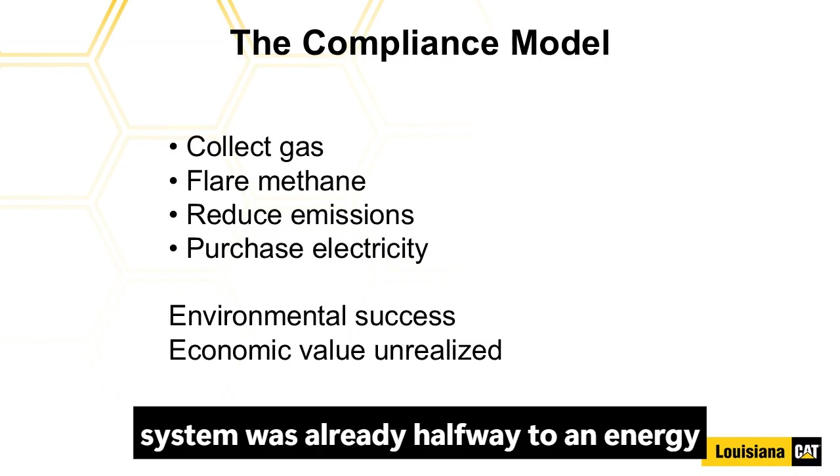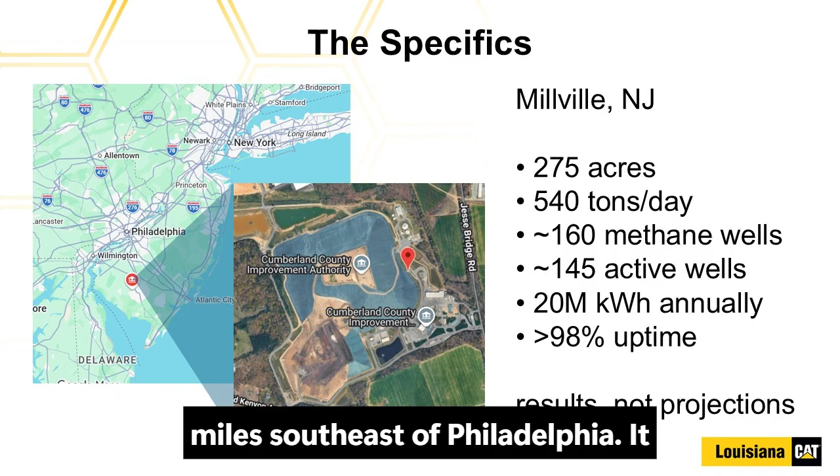Let's look at the specifics. The landfill sits on 275 acres in Millville, New Jersey, about 45 miles southeast of Philadelphia. It receives roughly 540 tons of solid waste every single day. There's approximately 160 methane wells, and they run about 145 of them actively at any given time.

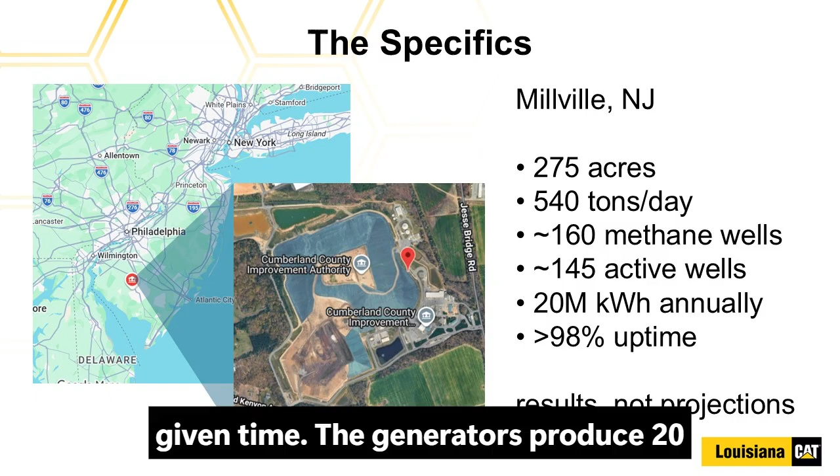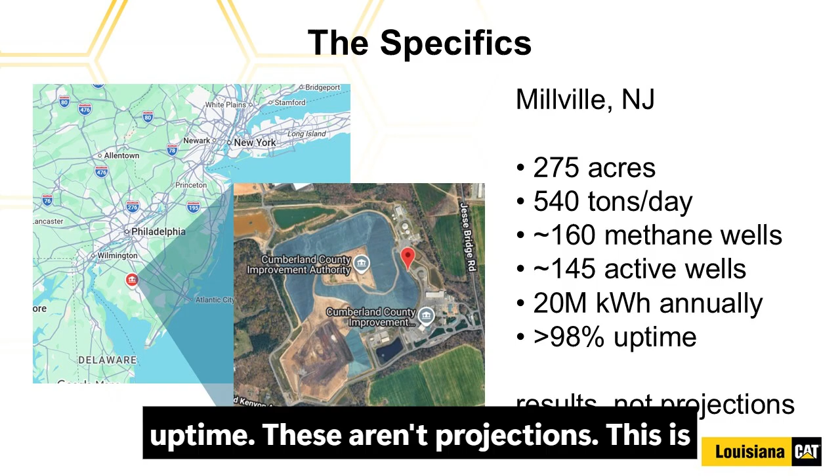The generators produce 20 million kilowatt hours annually. To put that into perspective, that's enough power to run about 1,600 homes. Generators exceed 98% uptime. These aren't projections—this is not theory. For Cumberland County, this is operational reality.

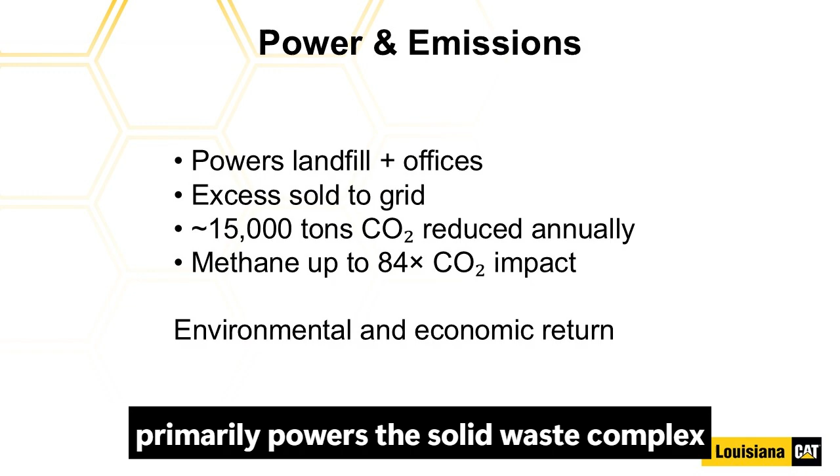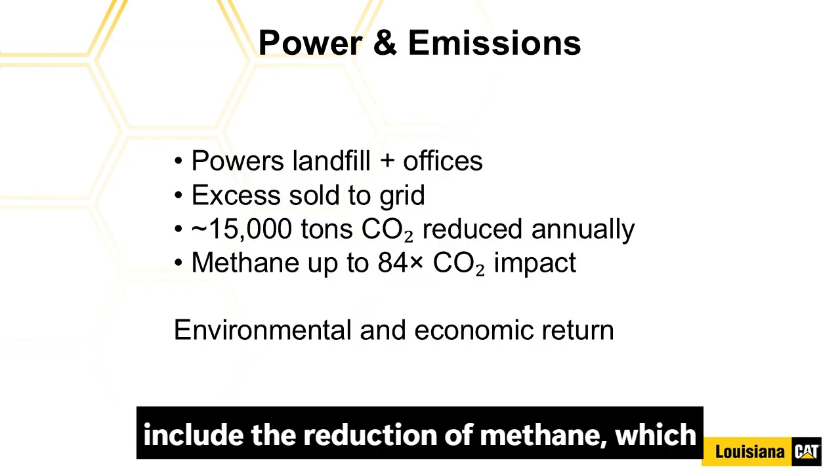The 4.8 megawatt plant primarily powers the solid waste complex and its nearby admin offices, but they do sell excess electricity back to the utility grid. The project reduces about 15,000 tons of carbon dioxide annually, and that doesn't include the reduction of methane, which has a global warming potential of up to 84 times that of CO2. Controlled combustion through power generation creates both an environmental and an economic return.

There's also a community dimension here. If you drive by a landfill and you don't smell an odor, that's a good day. Reduced flaring, reduced truck traffic, reduced visible emissions—sustainability here is not abstract. It's something the neighbors are experiencing.

Cumberland County entered its energy partnership around 2011 through a state bid process. The authority avoided upfront capital costs through a private partner-funded energy power plant. Cumberland shared some of the costs on the public portions. The partnership spread risk and kept costs predictable.

Ownership of the power plant has changed hands several times. It started with PP&L, they were bought out by Talen, then EPP, and now it's operated by NextEra. But today, they're considering buying out their energy partners. The structure has allowed the authority to leverage private technical expertise while limiting capital exposure.

The estimated annual economic impact of the microgrid is about $13.5 million. Importantly, operations are still funded through tipping fees and related revenue, but not taxpayer subsidies.

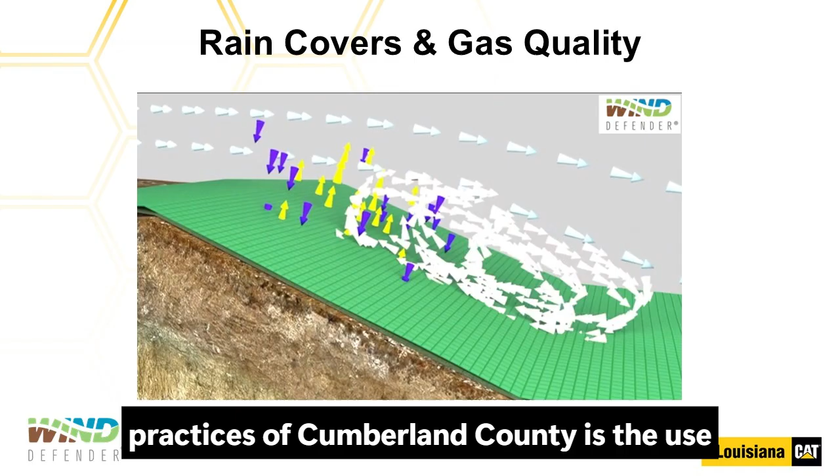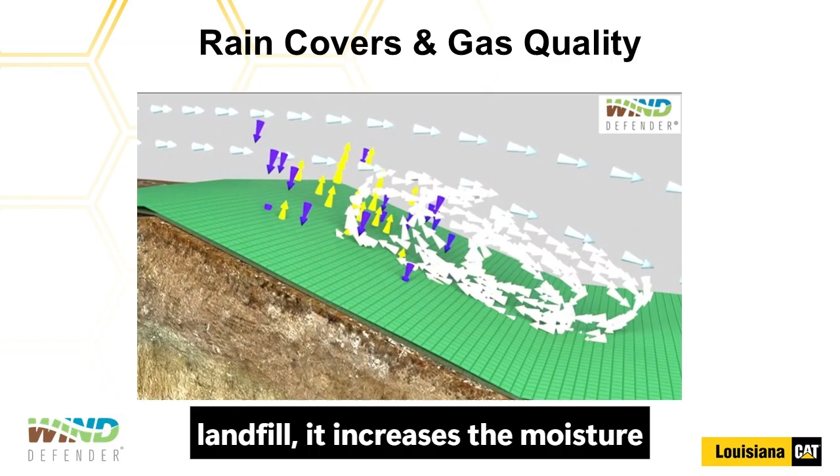It all begins at the surface. One of the important operational practices of Cumberland County is the use of rain covers. Now, rain covers are normally thought of as a leachate control tool, but they're also a gas management tool. When stormwater infiltrates the landfill, it increases the moisture content within the waste mass, and that moisture increases the leachate generation and can dilute the methane within the gas stream.

So by increasing rain cover, the authority reduces stormwater infiltration. Less water entering the waste mass means less leachate formation, but it also means a more stable gas environment underground. The more stable the methane concentration, the more stable the combustion stability at the engine. Landfill gas is already variable, so anything you can do to reduce variability improves your uptime.

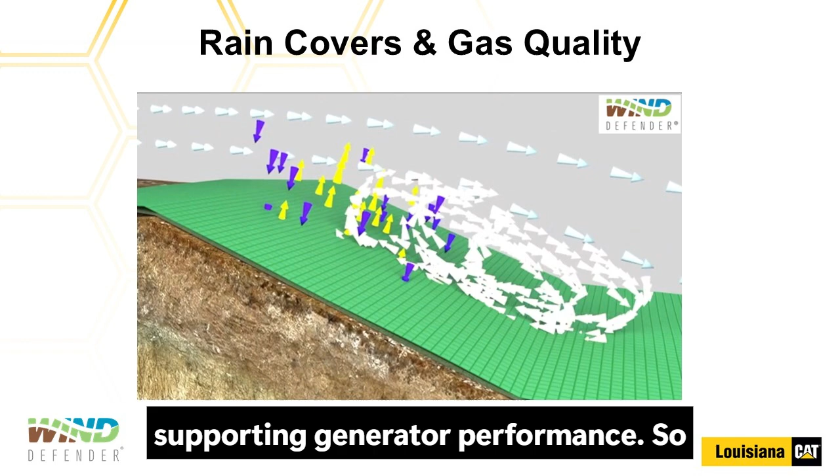The covers therefore serve multiple functions at once: reduce the leachate load and support gas quality. They are indirectly supporting generator performance. So here's how they do it.

Cumberland is required to cover the fill with 12 inches of soil, and then they use a 20 mil geocomposite liner stitched together over top. But instead of using ropes and sandbags, they use the Wind Defender green mesh that goes over top of the

black liners, which is uniquely designed to be held in place by the wind. Again, integration. A surface decision here is affecting subsurface chemistry, which also affects engine reliability and ultimately affects revenue. Covers are not just environmental controls, they are operational strategy.

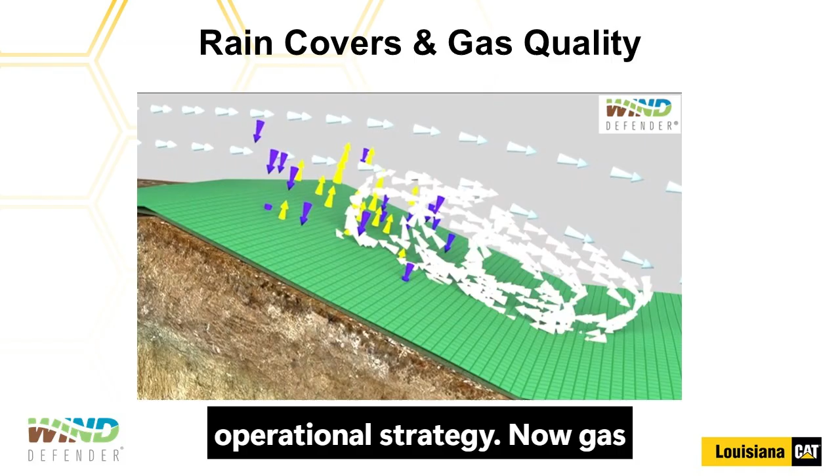Now, gas management depends on how you collect it. At Cumberland County, there's about 160 methane wells with about 145 active at any given time. As the landfill expands, additional vertical wells are added.

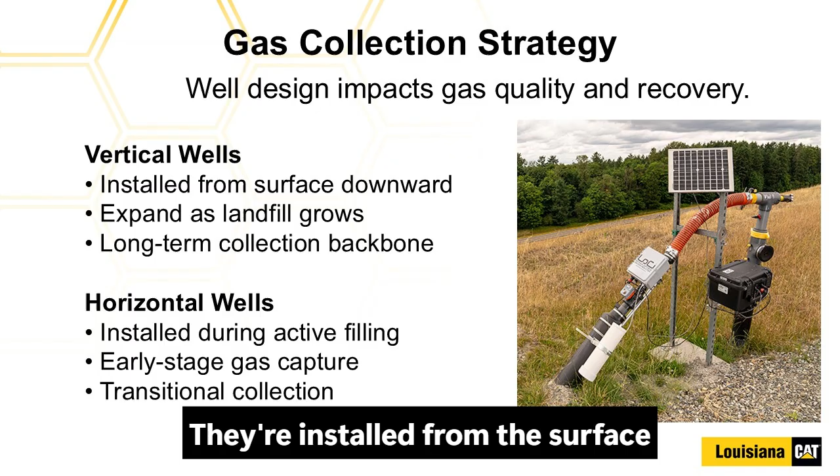Vertical wells form the long-term backbone of the gas collection system. They're installed from the surface downward into the waste mass, and they remain active through later stages of the landfill development. Because methane follows anything penetrating the soil, the well is drilled down to the bottom and perforated pipe is installed all the way up, but no closer than 40 feet from the surface. Each well is about 200 feet apart to prevent overdraw on other wells, and they keep them 40 feet from

the side slopes. Horizontal wells, by contrast, are typically installed during active filling. They allow early gas capture before the cell is fully built out. They can improve early methane recovery and reduce uncontrolled emissions in newer sections of the landfill.

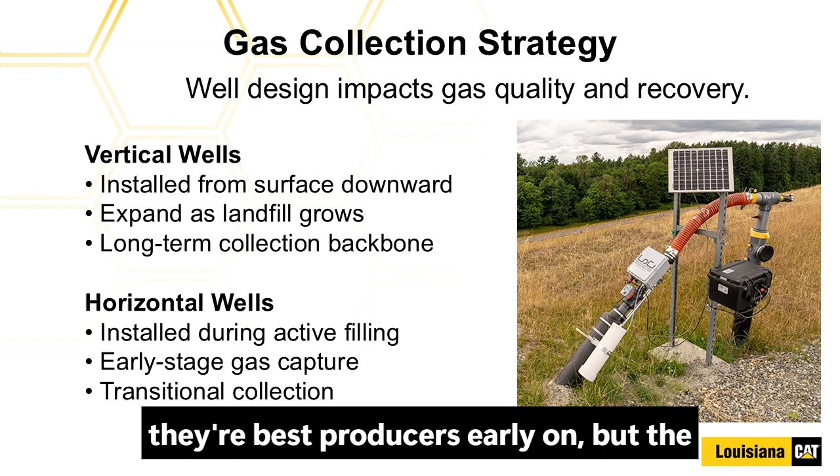However, horizontal wells are sacrificial. They collapse under pressure as the fill gets deeper, and because they are used to catch early gas, they're best producers early on. But the pipe valleys get filled in with water, and there's no way to fix that.

So there is a strategy component here. Horizontal wells support early capture, vertical wells support sustained collection. As waste mass matures, vertical wells become more critical to maintaining consistent gas quality and volume.

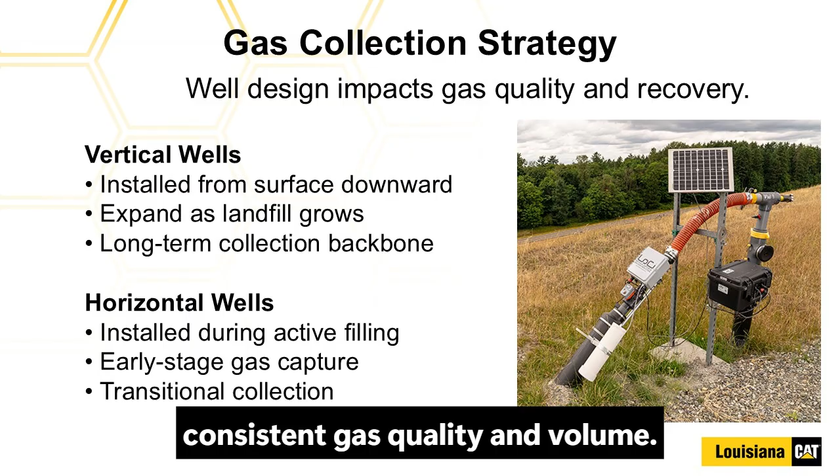Good power starts with good gas. Well field design affects oxygen intrusion risk, methane concentration stability, and total recoverable gas. It directly influences combustion stability at the engines. That's why the site conducts frequent monitoring, including approximately 8 daily readings on key wells, and holds monthly performance reviews.

So the authority uses the automated wellheads on 50 wells, and they take 8 samples per day. Cumberland meets then with Loci monthly to discuss trends. What they've found is that oxygen intrusion is their biggest enemy. They keep service techs and spares on site and conduct proactive maintenance, and gas quality is managed intentionally.

It's not just assumed. It's important to understand that landfill gas is not pipeline gas. It's roughly half methane and half whatever comes out of the land. Sulfur compounds, siloxanes, moisture. Variability is a constant reality, and the engine selection matters.

So according to Steve Gabriel, partner with EPP, you need a very robust engine to actually take care and destroy the gas and make electricity. They did a lot of research, and they found that Caterpillar had a very robust type of engine that could handle biogas at the landfill.

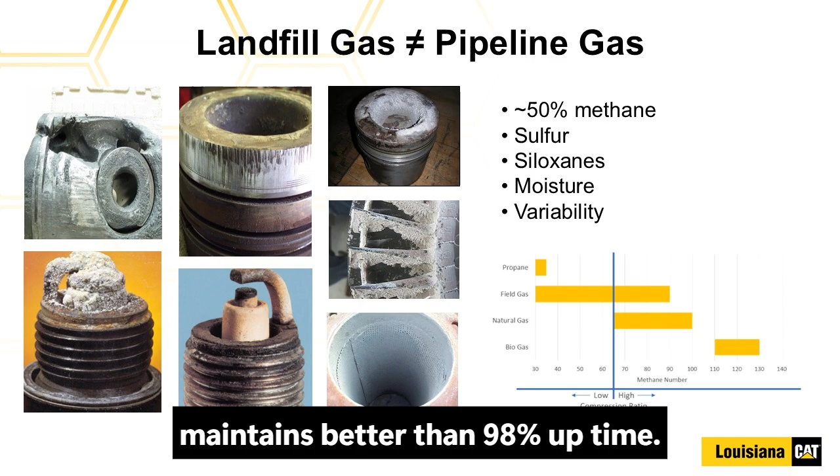Other landfills tried to do this as well with other engines, but the Cat engine's unique, and they said there's not a lot of manufacturers that have a product that can handle landfill gas. Reliability here was not optional, it's foundational. Today, the system maintains better than 98% uptime.

What did they install? It was 3 Cat G3520 generator sets. It's a 4.8 megawatt landfill gas to energy facility, but they didn't stop there. They built and operate their own microgrid.

During the design, they found that in order to run at greater than 80% uptime, they would need a gas supply of 1,400 SCFM. But they're not running at 80%, they're running at 98% uptime. How did they do it?

Well, originally they planned to run 2 engines and keep a third one in reserve, but instead now they just run 3 engines at a reduced power factor.

Because what they found was if they're running two engines and one unexpectedly goes down, it takes time for that third engine to start up, reducing uptime. But if they're running three engines at reduced load and one goes down, the two remaining engines can pick up the rest of the load.

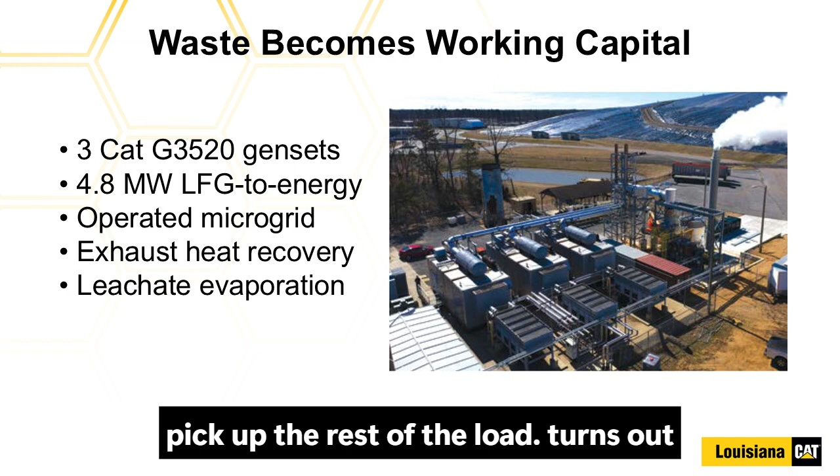It turns out that downtime now is only for planned maintenance. The next opportunity emerged from simple observation: the engines were producing continuous exhaust heat, and that heat was going to be unused.

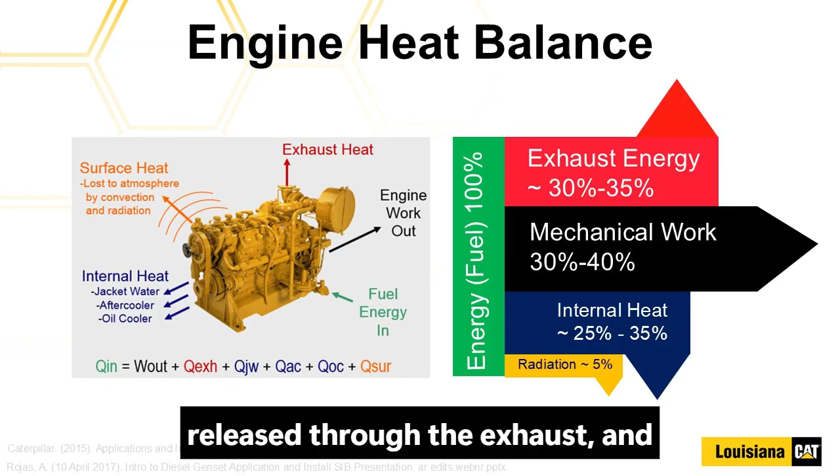So let's do a quick review of basic engine heat balance. The total fuel energy entering the system, whether gas, diesel, or another fuel, only 30 to 40% is turned into mechanical work, which is then turned into electrical work. The rest is released as heat: 25 to 35% internal to the engine, 30 to 35% released through the exhaust, and around 5% just radiated off the engine.

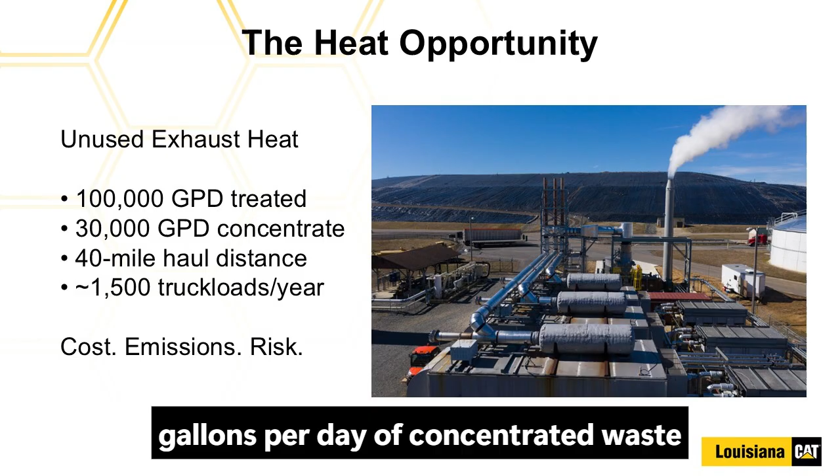At the same time, the site was treating about 100,000 gallons of leachate per day through reverse osmosis, creating roughly 30,000 gallons per day of concentrated waste that had to be hauled away 40 miles. Nearly 1,500 truckloads per year left the site. It was cost, it was emissions, it was risk.

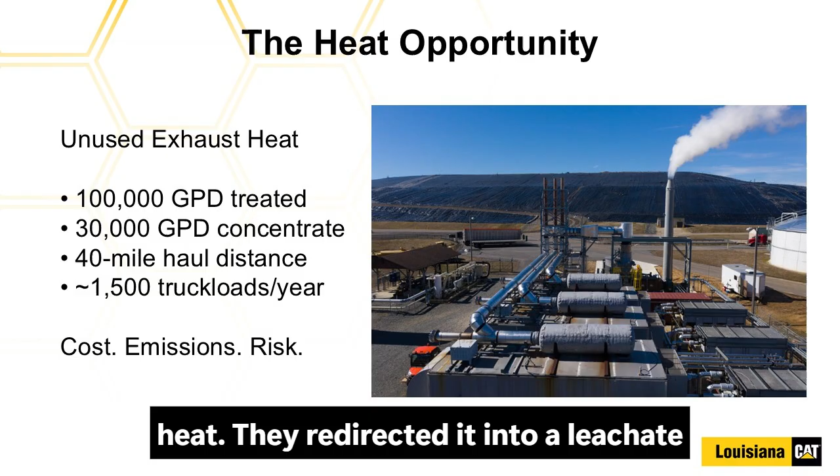But what they did was capture the generator exhaust heat and redirect it into a leachate evaporation system. Waste now is becoming working capital.

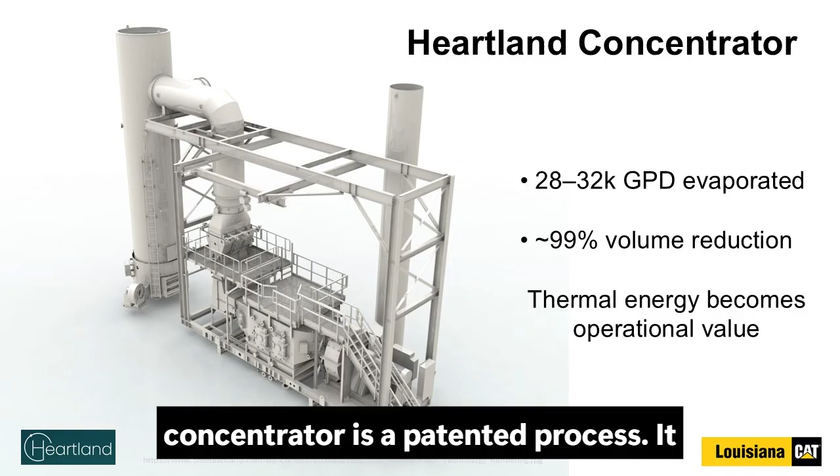Working with Heartland Water Technology, the authority installed the Heartland concentrator system. The Heartland concentrator is a patented process that uses exhaust heat from the power plant for evaporation, creating an energy-efficient cogeneration solution.

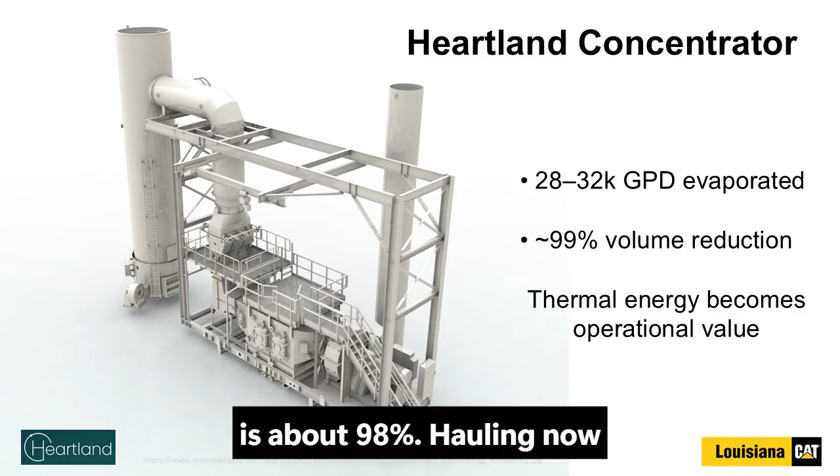The exhaust streams from the generator are ducted under negative pressure into the concentrator, where thermal energy evaporates the leachate concentrate. The system now evaporates between 28,000 and 32,000 gallons of leachate concentrate per day. Combined with reverse osmosis, the overall reduction in raw leachate volume is about 98%. Hauling now only exists in case of emergency or planned maintenance.

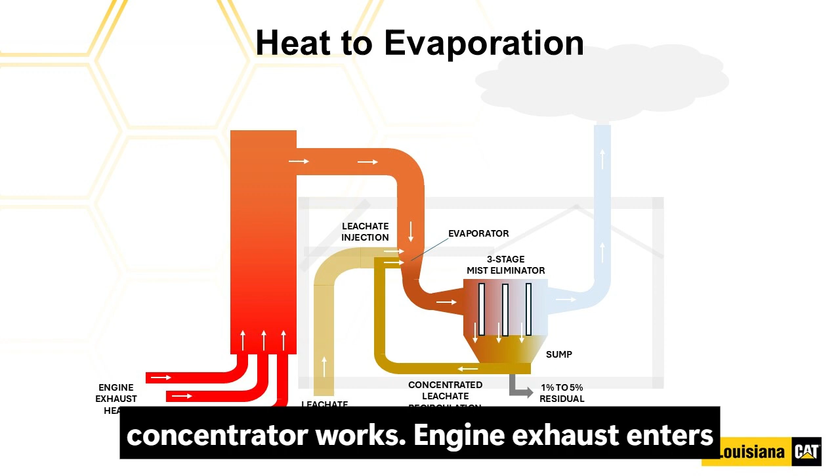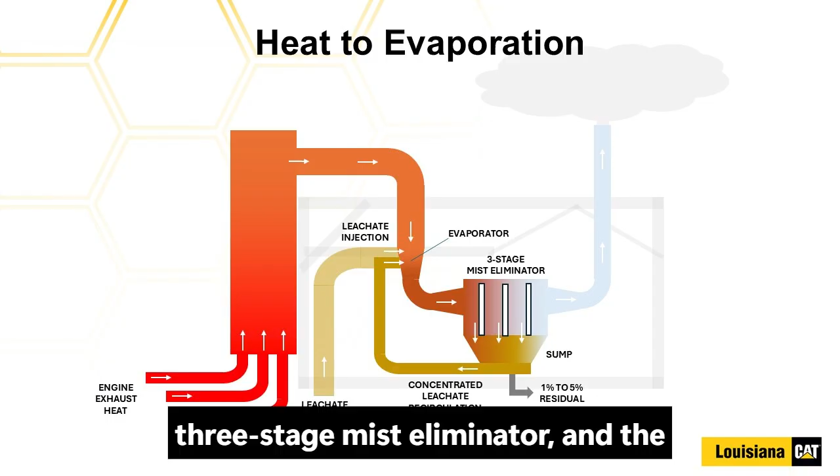Here's an overview of how the concentrator works. Engine exhaust enters the column on the left and is ducted into the mixing chamber where the leachate is atomized. The mixture passes through a three-stage mist eliminator and the water vapor exits the stack. The concentrated leachate is recycled through the evaporation process.

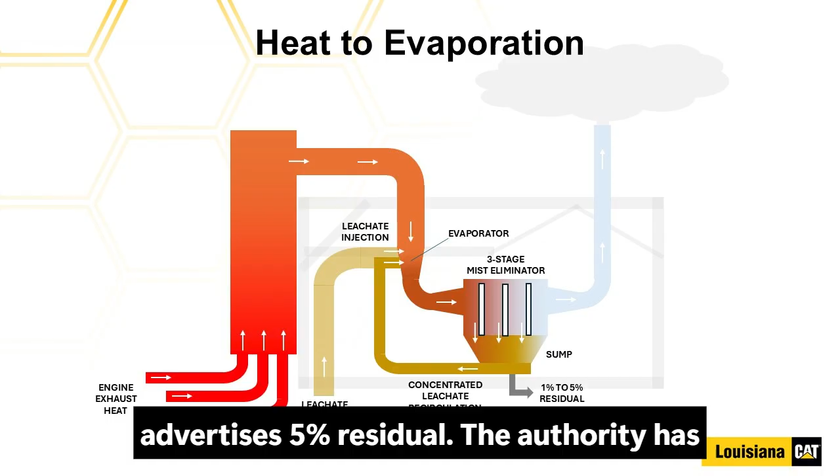Heartland advertises 5% residual. The authority has experienced as low as 1% residual.

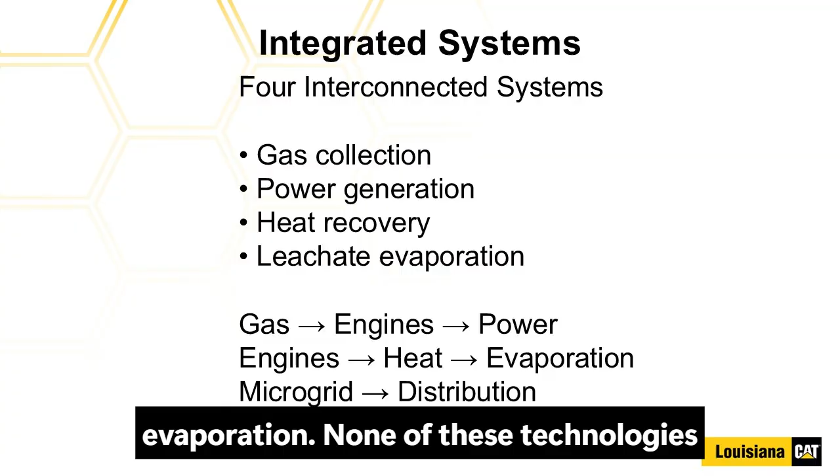When you step back, the energy hub rests on four integrated systems: gas collection, power generation, heat recovery, and leachate evaporation. None of these technologies are revolutionary on their own; the value comes from integration. Gas flows to the engines, generators produce electricity, engine heat drives evaporation, and the microgrid distributes power on site. Each system reinforces the other.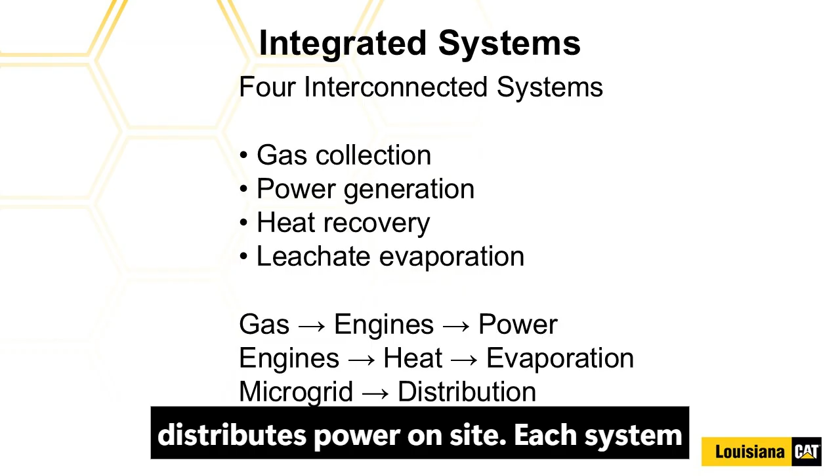What about renewable natural gas? Well, it was evaluated. The site's volume and scale, cleanup, and pipeline economics did not support renewable natural gas as an optimal pathway. Electricity generation provided better alignment with available gas qualities and infrastructure realities. They needed about 3,000 SCFM of renewable natural gas in order to sell it.

The lesson here is not that renewable natural gas is inappropriate. It's that it has to be a strategic fit, more than a trend to chase. Each landfill must evaluate scale, capital, and market access independently.

This transformation required a mindset shift. Instead of asking how do we comply, leadership began asking how do we control our energy destiny. Control meant owning electrical infrastructure. Control meant reducing dependence on hauling. Control meant internalizing energy flows instead of exporting value.

Sustainability became an operational strategy, not just environmental messaging, not just a compliance expense. And they're not done yet.

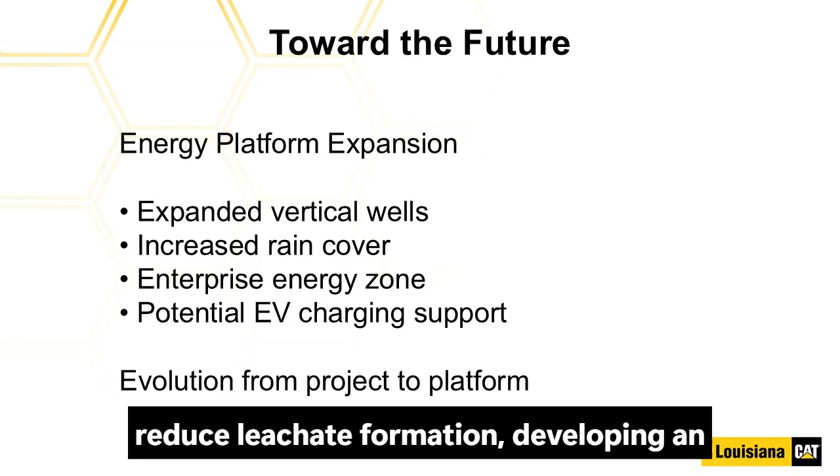Future plans include expanding vertical wells, increasing rain cover to reduce leachate formation, developing an enterprise energy zone, and potentially supporting EV charging infrastructure. So what began as a straightforward waste-to-energy installation has now evolved into a comprehensive energy platform.

Every landfill deals with methane. Every landfill manages leachate. The strategic decision is whether those streams remain costs or become assets. Cumberland County chose integration. They captured what they already had, they used it fully, and they built an energy hub in the process.